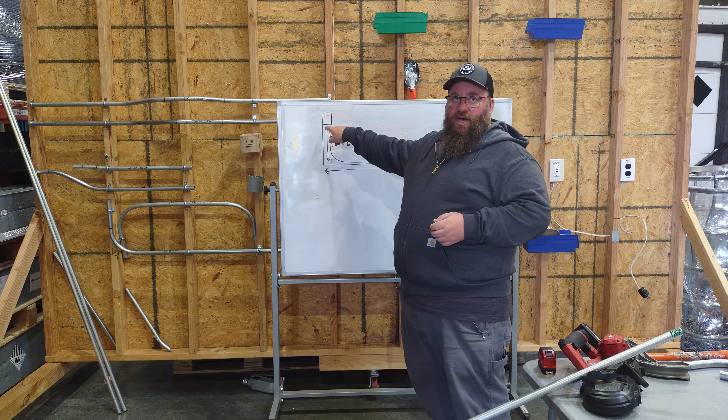We are going to be doing a stub up video, meaning that I'm taking the pipe and I'm stubbing up into a box. So the important part is from the floor to the box or whatever I'm shooting up into, the other side of the bend. When we're dealing with back-to-back bends, which will be the next video, we're dealing with the in-between items. So from this wall to this wall is the most important measurement, okay?

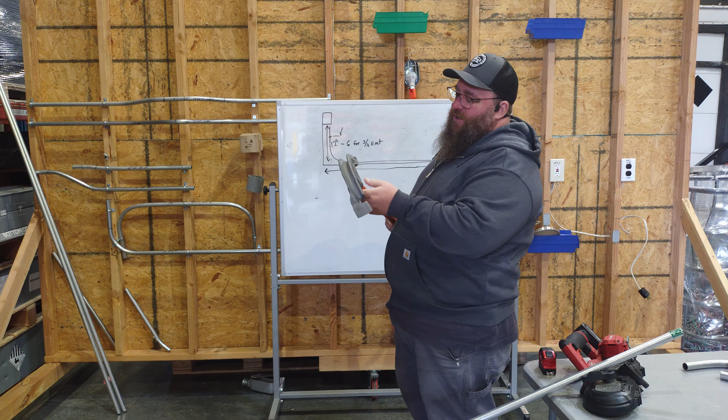So kind of interesting, but for this one, because when we bend for a 90, we actually increase pipe. It's the only one that increases pipe, so we have to have a deduction from that. So if we want to do a 12-inch stub up, we need to decrease what it says on our bender. Remember, we have to use the bender and look at their deduction. This happens to be a Greenlee bender. Ideal benders are the same, 6 inches for 3/4.

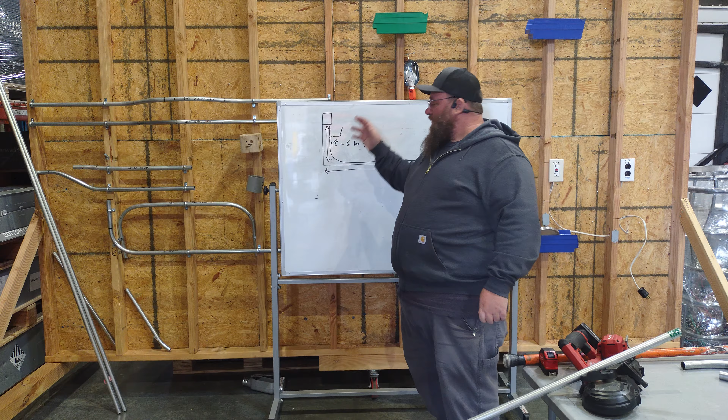It does change based on the size of your pipe. Like one of my 1.25 is 11 inches. One of my 1.25 says 12 inches. So make sure you're following your bender's chart. So get a bender and own it. That's the one you're going to use for the rest of your life. I've got benders that are 20 years old. So just kind of keep that in mind here.

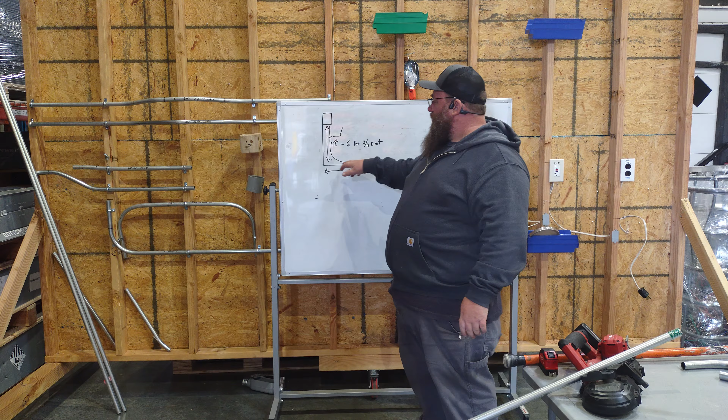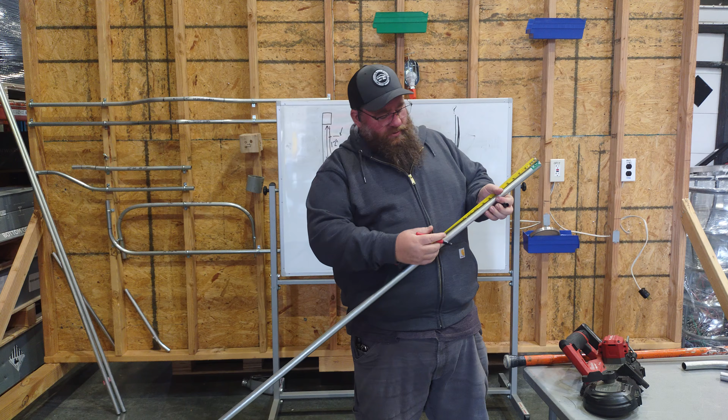So I'm going to deduct from my 12-inch mark here, I'm going to deduct 6 inches and start my mark there. So I'm going to take my piece of pipe here, I'm going to measure down 12 inches. Of course, I put it in the wrong pocket. I'm going to measure down 12 inches. I'm going to make a mark, I'm just going to make a dot so you guys can see. And then I'm going to deduct 6 inches. 1, 2, 3, 4, 5, 6. Which, as all of us know, is 6 inches.

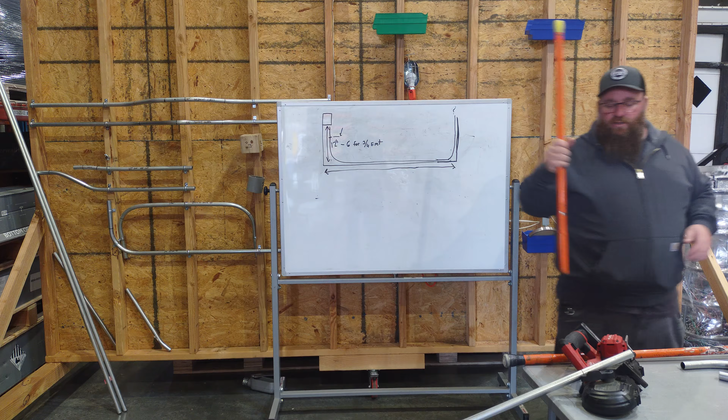So we made it nice and easy for you guys just to deduct it in half, but counting down is usually how I do it if it's a harder mark. I'm going to go ahead and ringtail it. Remember, do that with a pencil, not with a marker here. And this is where I'm going to get into kind of a cool tip: if I'm doing 3/4 pipe, I usually keep my 1/2-inch bender or just this bar that I've set here and marked off, that can actually help me do the bend. And I'm going to show you how that works in a second.

So we're going to take our bender, we're going to be using the bender with the arrow here. Going to tilt it over, bring it down to the bend mark here, we're going to slide it up. Remember, these first 4 bends are all done on one piece of pipe. You should not ruin any more than one piece of pipe, and that one piece of pipe should give you some adjustment there. So we're going to mark it. It's on the arrow line here. We're going to put it on the ground.

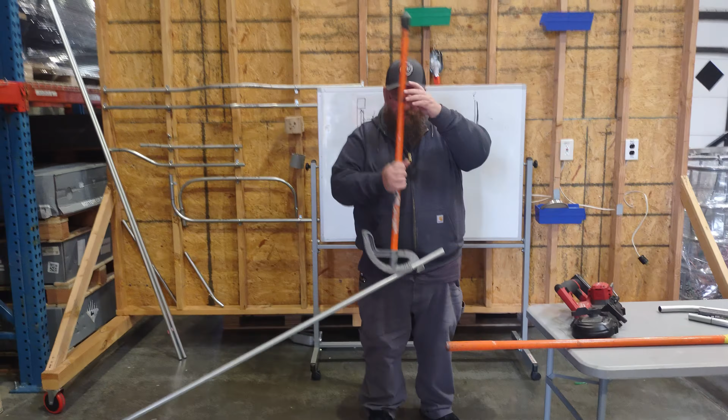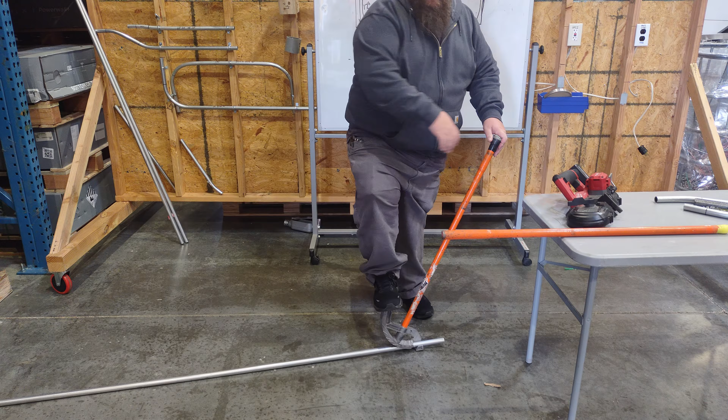Now the most important thing is pressure here. So when we bend, we want to make sure we keep pressure either on our hand or our foot. So we're going to reach up here, we're going to pull back. And if I let up with my hands, I want to make sure I keep pressure here. Otherwise, I'll get kinky. So I want to keep going, keep going. I use Greenlee benders so I can look right over the top and I can watch for it to happen.

Now, one thing I really like with that second bender, I can put it here and add that little tip and I can push. I'm pushing with my foot this direction and with my hand this direction, and now I can pull here. It makes my bends really easy to do. And now that I've got this piece of pipe on here, I can see that's a 90-degree bend. I can look down at my bender because it's a Greenlee bender. I can see my point is lined up directly, and if I let up, how does it look? I can take my pipe off, looks like a nice 90-degree bend to me.

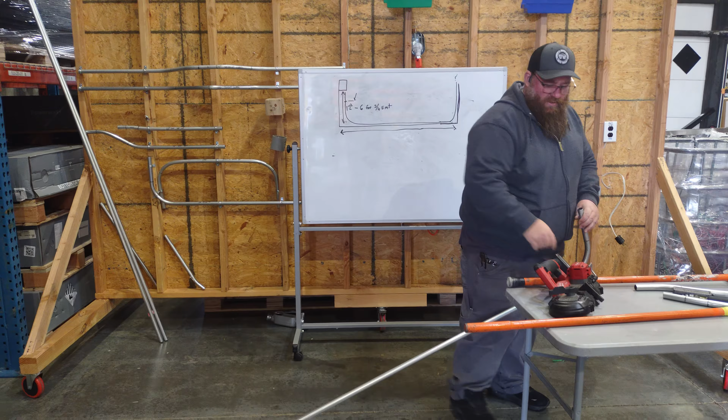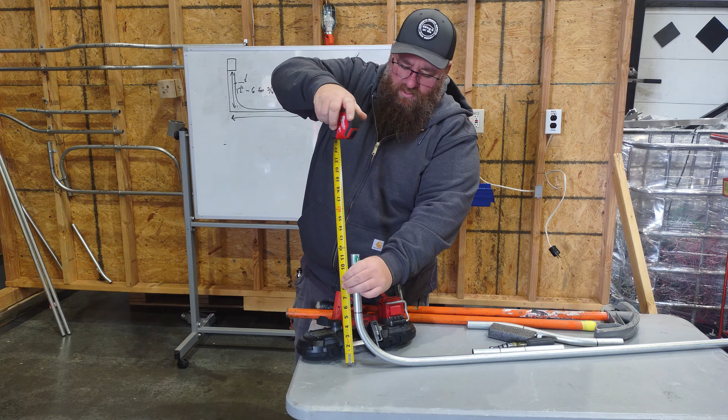Take my bar here, pick it up. And we can verify by coming over here on the table. We can keep it nice and level here. What we're going to do is check and make sure, one, is it straight up and down? Looks pretty straight up and down to me. And it is on the dot 12 inches, or within reason. On my side, it's 12 inches. So we know that that will fit perfectly into the box, okay?

Now your bender might be slightly different. You may see your bender bends too high and you need to go like 5.5 or whatever that may be. You might have to adjust it and write that down, or just buy a Greenlee bender because they're really, really close all the time. I love them. So this is how you do a 90-degree stub up when from here to here is the most important measurement. And remember, I make my mark and I always bend back towards the mark.

So if I was all the way down here on the end and I was trying to make this bend up, I wouldn't pull this way. I always pull on my bend here. So my mark is here. I'm pulling the short side or the far side of the mark. I don't know how to really say that. So if my mark's here, I'm always leaving what I measured as the pull, okay?

So if we're all the way down here, we can't flip the bender the other direction and pull this way. That would be a back-to-back bend mark. For ours, we always pull from the measurement. So we're gonna put our bender here and pull up. I can't flip it and pull the other way. It only works one way.